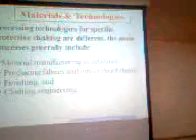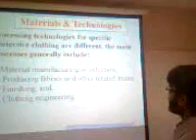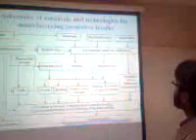Materials and technologies. The selection of materials is very important for protective clothing. There are 4 steps in the selection: material manufacturing or selection, producing fabrics and other related items, finishing, and clothing engineering. This is the systematic approach for the selection of a protective material.

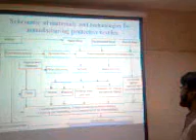Fibers, metals, metal fibers, regenerated fibers, natural fibers, and fibers in continuous filament form, or synthetic fibers in staple form, or non-woven fabrics are usually used for this purpose. Steps in the selection of the protective clothing material. Step 1: assess hazard. First, we have to assess what type of hazard and what is the severity of the hazard where we are using the protective clothing.

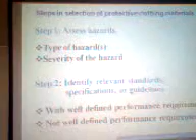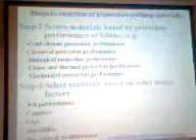Step 2 is to identify relevant standards, specifications or guidelines with well-defined performance requirements, so the protective clothing should be well-defined in its performance. Step 3 is to screen materials based on protection performance of fabrics: cold climate protection performance, chemical protection performance, biological protection performance, flame and thermal protection performance, and mechanical protection performance.

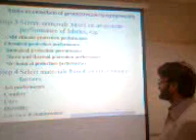Step 4 is to select material based on other major factors: job performance, comfort, cost, durability, use, care and maintenance. These are all factors involved in the selection of protective clothing.

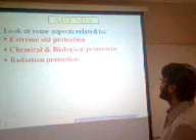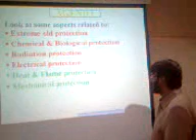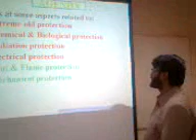Let's look at some aspects related to protection. These are extreme cold protection, chemical and biological protection, radiation protection, electrical protection, mechanical protection, and heat and flame protection. All these scenarios require proper protective clothing so that we can meet the requirements for protection. And another, high visibility protection, is also important.